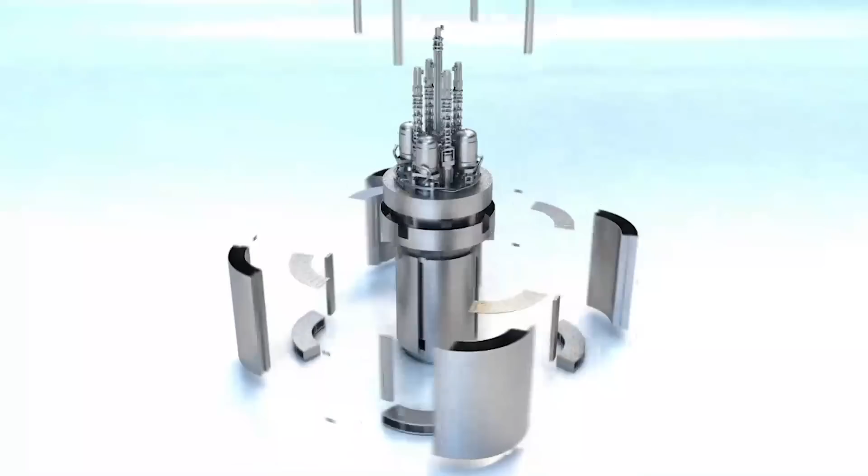Their goal is to bring micro-sized and modular nuclear power plants to the industry. We are Aalo Atomics. We design and build nuclear reactors that are small enough to fit in your garage and can power anything from a data center to a large city.

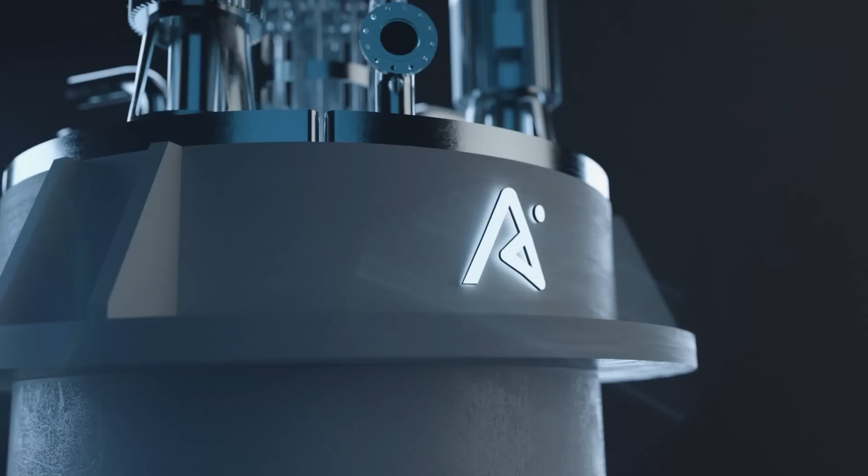To do that, they want to build this factory here to vertically integrate the entire process and mass produce these nuclear plants. Unlike the normal nuclear plants that come to mind, large infrastructure projects the size of factories with thousands of workers and very complex operations, this uses new technology based on work done in the 1950s and 60s to bring semi-truck trailer-sized nuclear power plants.

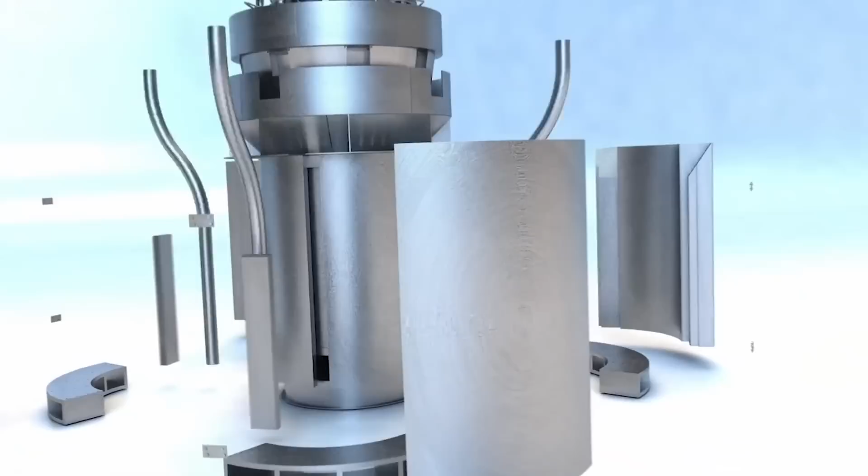And these, as I mentioned, are modular. They can be stacked together, so you could get 1, 2, or 3. Each one of them produces approximately 10 megawatts of electricity. It can also produce thermal energy in addition to the electricity because of the processes that are used.

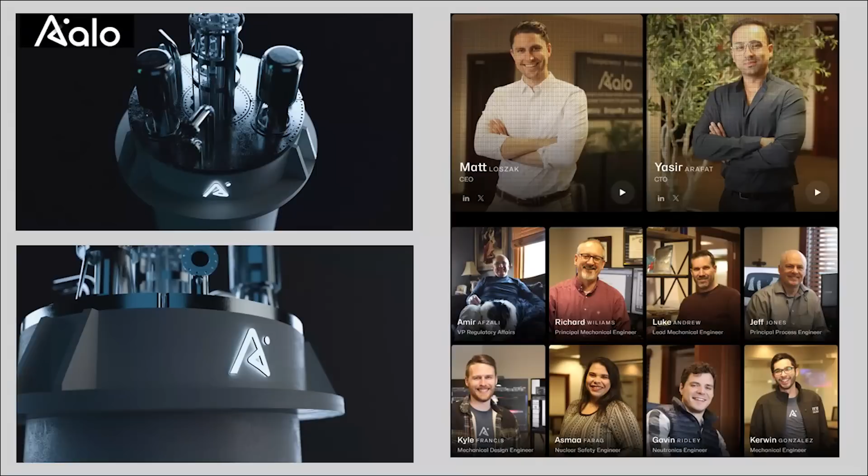Now we're going to go ahead and go into the factory. We're going to get a chance to talk to the CEO of the company, get some more details about their plans, and of course be part of the grand opening ceremony, which is just about to begin. This is pretty exciting, and I'm looking forward to learning more about this company and sharing with you what they are planning on doing, because it is pretty neat.

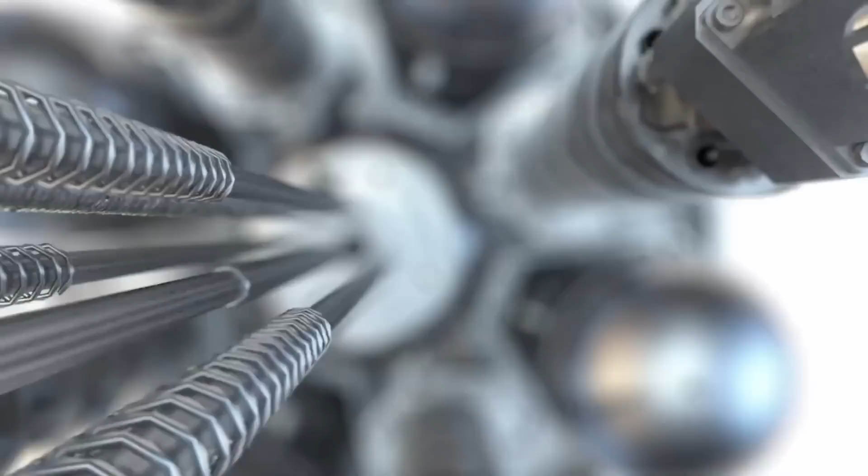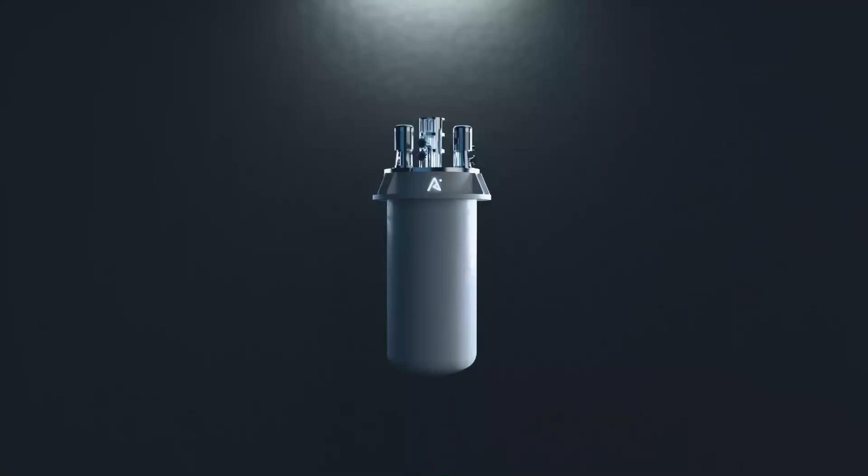These people knew that when they discovered fission, it was way better than anything else that existed at the time. Oil and gas was getting started, and they knew fission was 2 million times more energy dense than oil and gas. They knew that oil and gas would run out in a few hundred years, and that nuclear could last 10 million times longer.

And unfortunately, the whole world took it in a bit of a different direction. For a period of time, as we all know, nuclear energy and nuclear weapons were intertwined, and people tried to essentially throw out the baby with the bathwater. It's taken humanity 80 years since fission was first discovered to disentangle this complex web. But I think right now we're seeing the public realize that these two things are very different: nuclear weapons and nuclear energy.

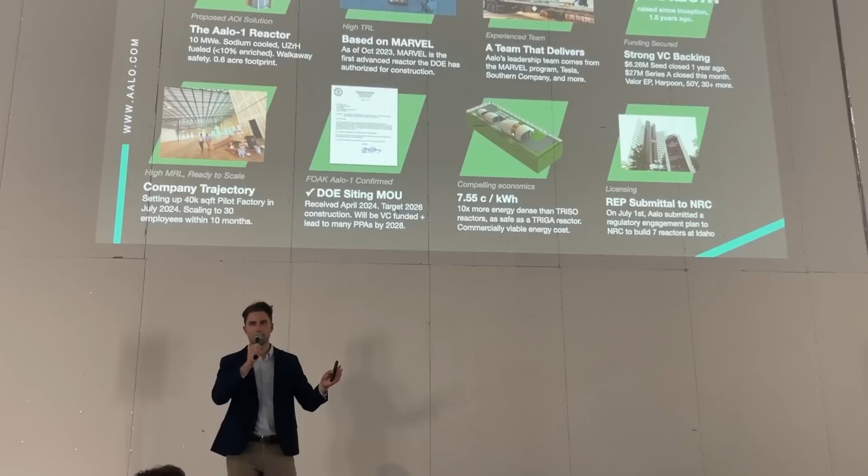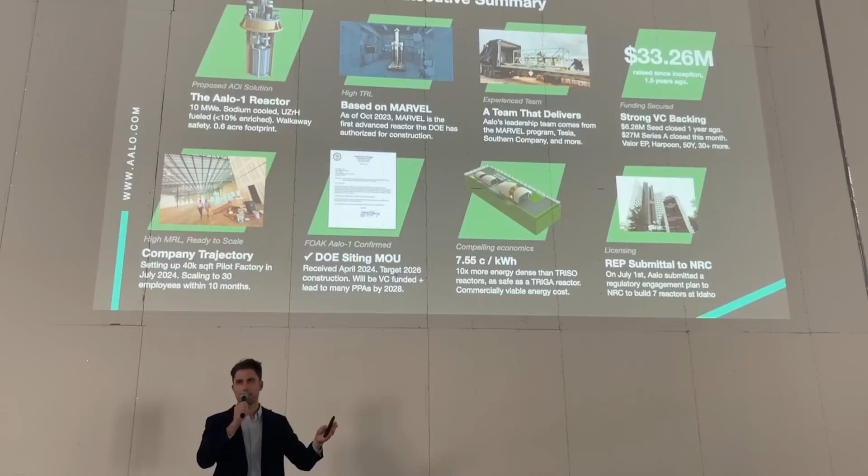I know some of you might know some of these things, but I want to highlight how far we've come. Around 12 to 14 months ago, the company was 1 or 2 people. Right now, 12 months later, we've moved into this 40,000 square foot manufacturing facility, and we've raised around 33 million in venture capital.

We've also recruited the team behind the first new advanced reactor being built in decades, the Marvel reactor. Our co-founder and CTO, Yasir, who is about to go up and talk, is the mastermind behind that reactor, along with many of the folks in this audience. This technology is under construction as we speak. The fuel has been fabricated, the reactor is being built, and what we are doing is commercializing a scaled-up, commercially-focused version of this reactor. We're calling it the Aalo 1.

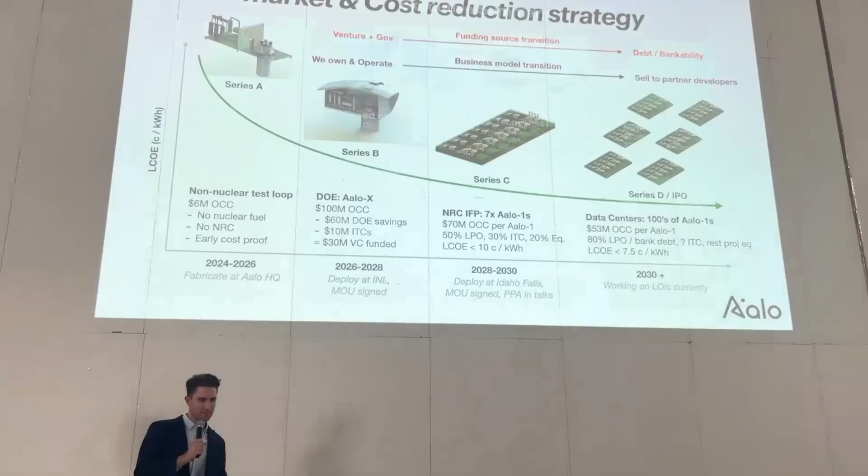So just by chance, these 3 different de-risking strategies fit into the panels of the wall, which is really nice. So the Series A, we're building the non-nuclear prototype that you can come back and see next year. That will help us de-risk the economics, the manufacturability, etc. The Series B that we're planning to raise next year will pay for the Aalo X, the Aalo experimental reactor, which we're building at Idaho National Lab. We're targeting '26 to '28 to build that and go vertical. And that will help us come further down the cost curve, move towards this vision of having this space where you are right now in the world's first small nuclear reactor factory.

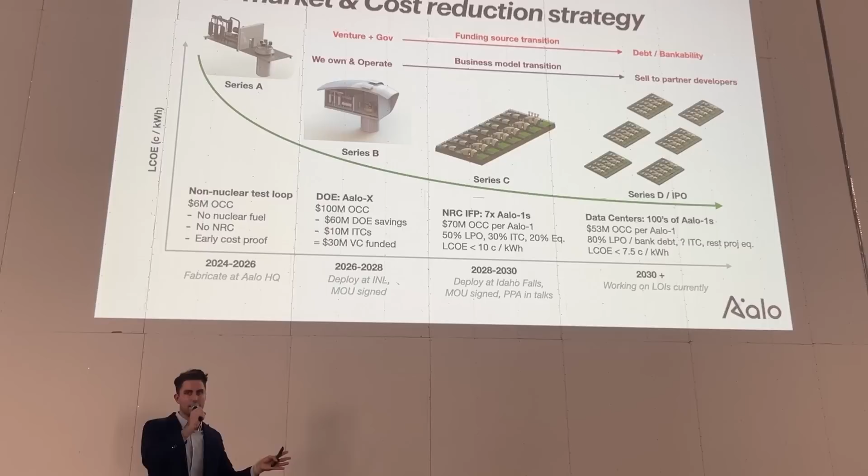So this, we intend to be a model that we can repeat in many places. This will be the first, but it will not be the last. And we'll repeat this in other places around the US. The goal is for each of these factories to be a true Giga Factory, in the sense that it will produce a gigawatt per year for each factory. And we'll repeat this in different locations, different countries, and make a big dent in the energy transition over the next few decades.

And so I want to especially highlight here why we chose Texas. Texas is an amazing place, with a history of cowboys and people doing things differently, not being afraid to trailblaze. Texas is very pro-nuclear. The same cannot be said of certain other states, like California. It has a history of innovation, especially in energy. In the early 2000s, natural gas was not the top energy producer in the US, but thanks to innovation here on fracking and oil and gas, natural gas is now the #1 source of electricity in the country. And we intend to continue that history of energy innovation with the next major source: nuclear.

Additionally, there's a lot of great talent here to hire from, SpaceX, Tesla, other similar companies. And lastly, it's a grid that needs us. It's a really fascinating combination of deregulation, FERC being less relevant, and a need for decentralized baseload energy. So we think this is an incredible place to be deploying the first small reactor factory in the world.

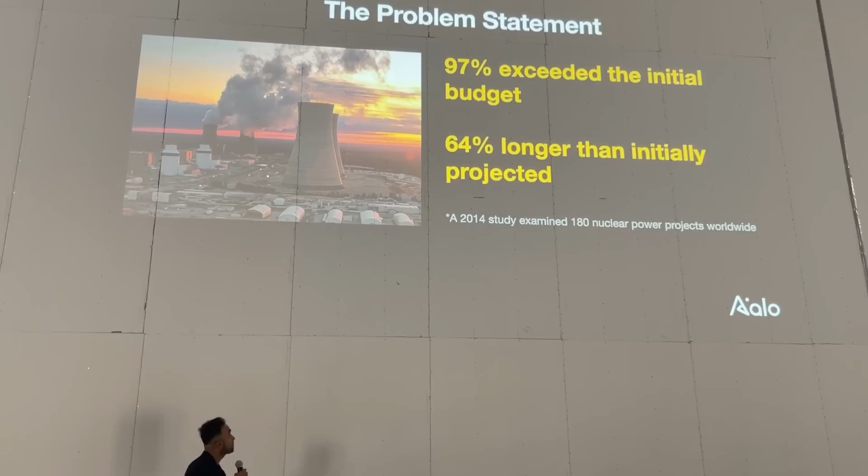And the reason being, if you look at current reactors, they're amazing. They're gigawatt scale systems. They're very reliable, extremely safe. We've been running them for many years.

In fact, we've got nearly 100 reactors in the country that's making 20% of all the power in the country. Did everybody know that? 20% of our electricity comes from nuclear.

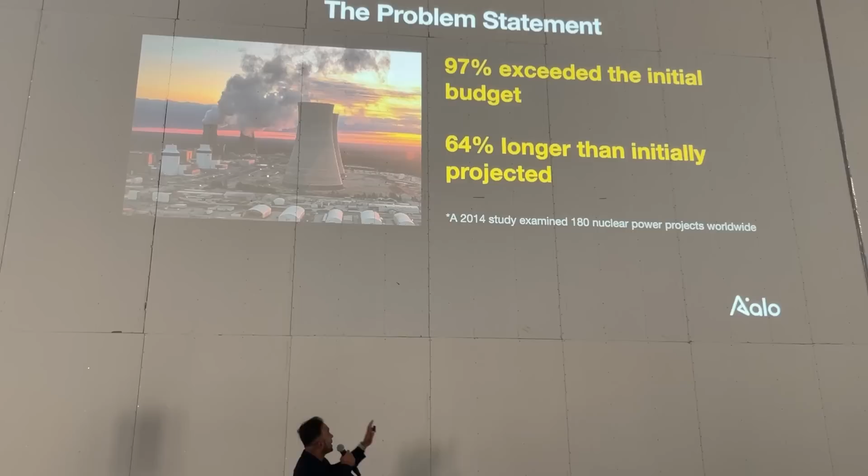But if you want to build new systems, the challenge is it always takes a lot more time and a lot more money than what you originally anticipated. In fact, if you look at the data, a 2014 study looked at 180 reactors around the world, and almost a staggering 97% were beyond schedule and budget. It's kind of crazy if you think about it. And most of them took a lot longer to build as well.

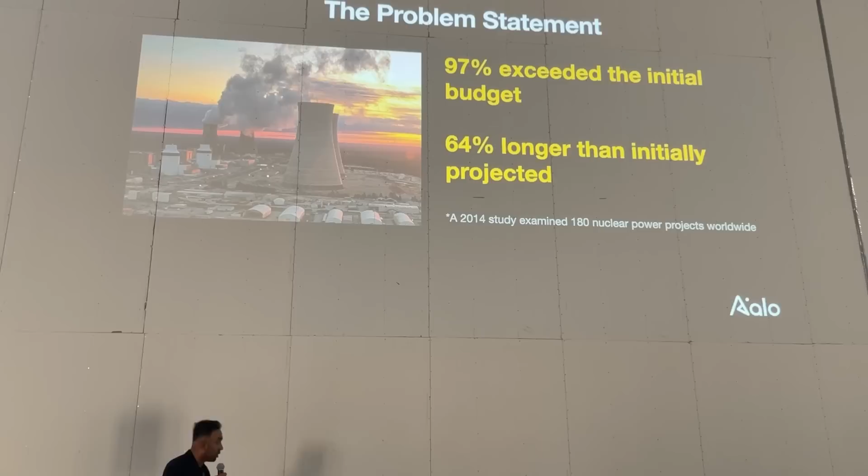And so at Aalo, we think that is an excellent problem to focus on. So what we're trying to do is rethink how we can deploy nuclear systems so that we can avert these two major risks. How can we build nuclear reactors that can be built without the risk of schedule and budget overrun?

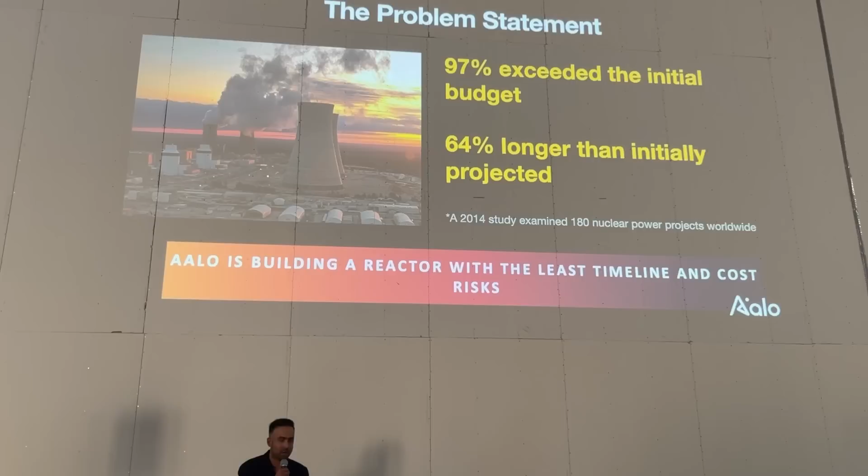The approach we've taken is, instead of building a gigawatt scale plant that at best takes about 10 years to build in the most optimistic scenario to get 1 gigawatt worth of energy, we're focusing on building a lot of small reactors in our factory where we can build nearly 1 gigawatt worth of energy every single year. That's a massive scale difference between 10 years to get 1 gigawatt versus getting the same power each year on the ground.

And as Matt mentioned, if you need more energy, we can have another factory built that can spit out another gigawatt. That's our goal. So welcome to the facility where we're going to demonstrate this.

This will be the facility where we'll be building, scaling up our efforts all the way to 100 reactors. So why are we doing this?

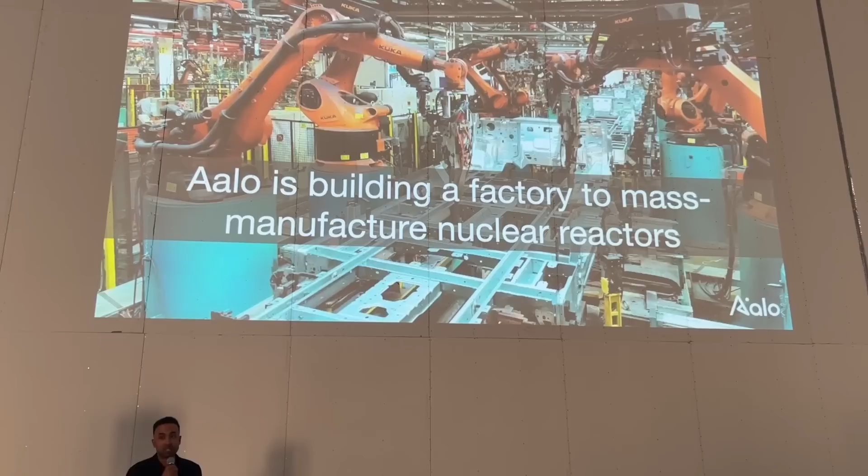Because if you think about it, it's not an entirely new idea. You may have heard of the term small modular reactors. Unfortunately, none of the SMRs are either too small or too modular, right? You only find a reactor or some vessel that is modular, but the rest of the plant is still a bespoke large power plant.

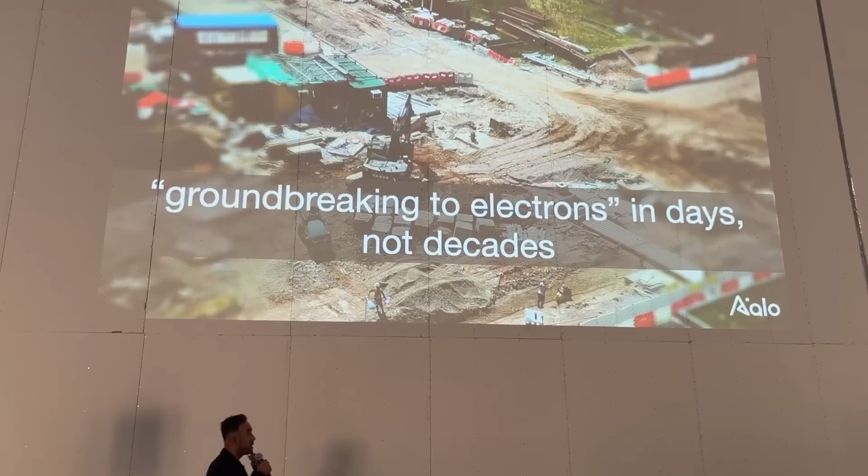What we're doing here is we want to build 95% or more in this factory and only have a small amount of activity that needs to be done on the site, so that from the time we do excavation to the time we generate electrons, it can be done in a matter of days, not a decade. That's a huge shift from how we do things today.

But we have to ask ourselves, what technology is best suited to follow this model? If you look at today's reactors, not every reactor is designed to be done entirely in factories. So we started off from a clean slate and asked ourselves, what is the ideal technology that makes most sense for a small reactor that can be mass manufactured?

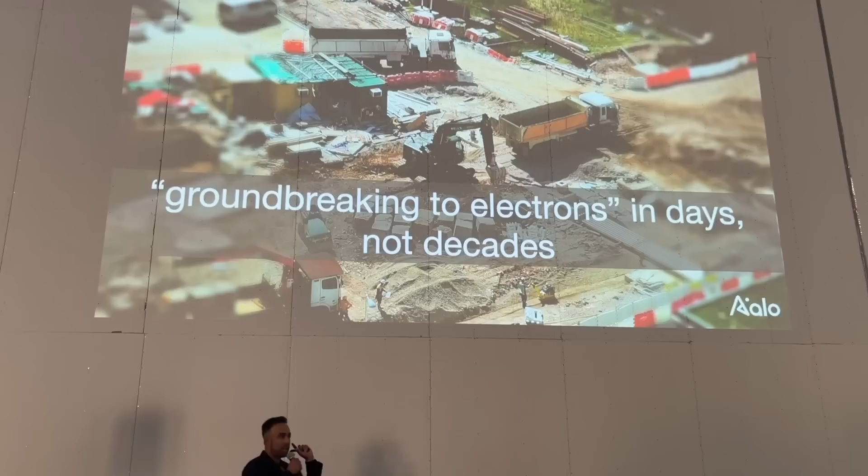And after looking a lot, it really boiled down to one thing: let's go build a reactor that inherently has an amazing, very high power density. That means from a certain volume, how much energy you can generate. That's the strength of nuclear, you can actually have it be very power dense, but not all nuclear are the same. You want to make sure you select technologies that are even more power dense than what we're used to.

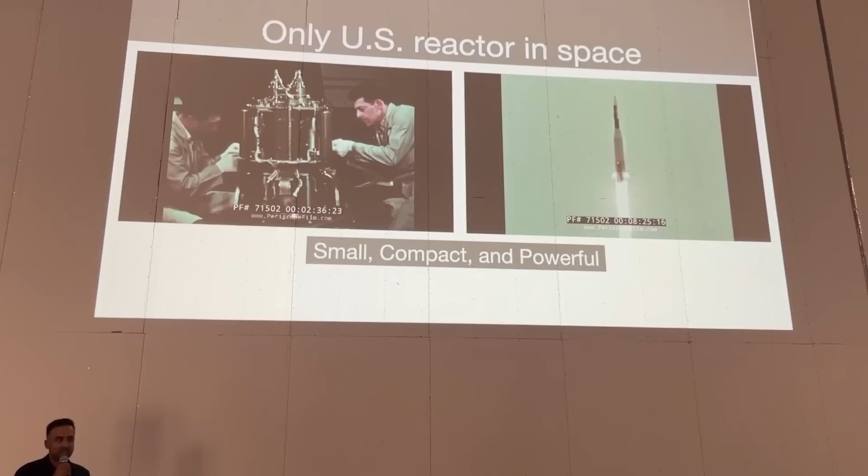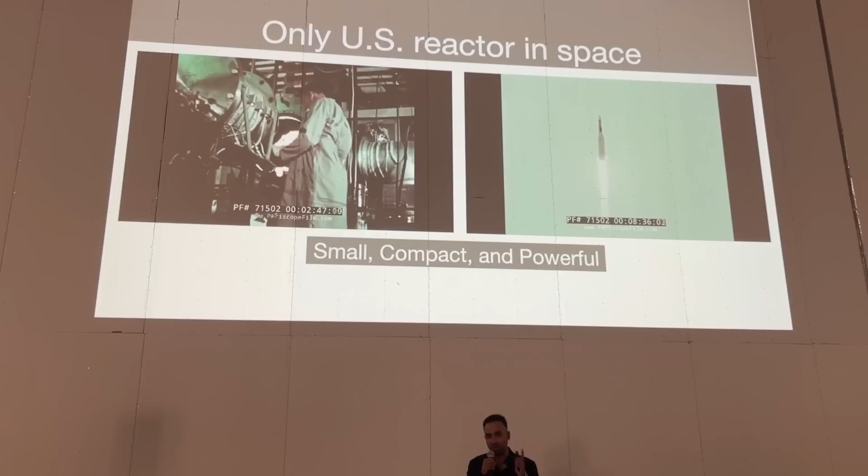And in fact, if you look in history, we did build certain reactors using this very technology. This is a reactor called SNAP-10A. Back in 1965, we built a small, tiny power reactor in this country and flew it to low Earth orbit. This was the first and only fission reactor that was flown to space. They selected this technology because it was small, compact, and powerful.

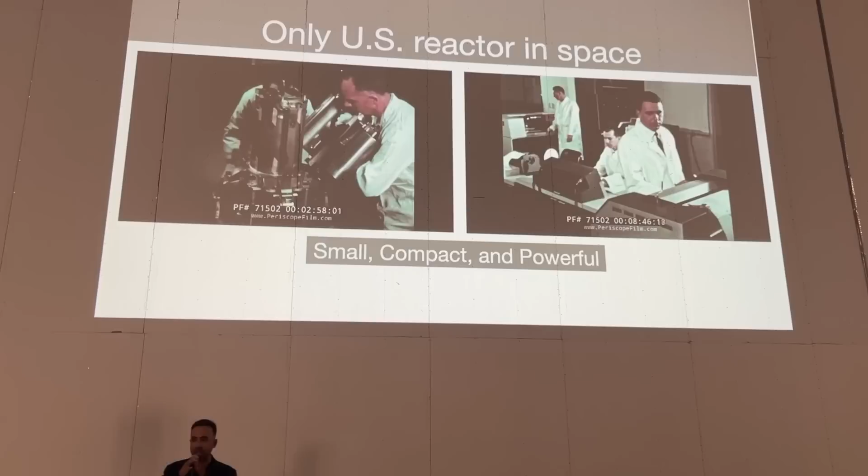You don't need tons and tons of systems to run this. Everything was compacted in a single box. And if you think about what we want to achieve in terrestrial reactors, it's something very, very similar to what the folks tried to build in the 1960s.

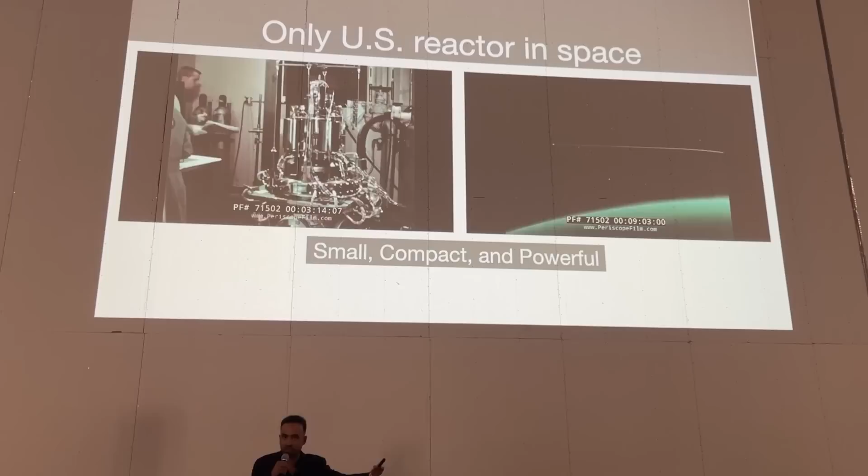So luckily, fast forwarding from 1965, at Idaho National Laboratory I started up a program called MARVEL, which Matt talked about, and we were able to essentially take that original design from SNAP-10A and design a system for terrestrial applications.

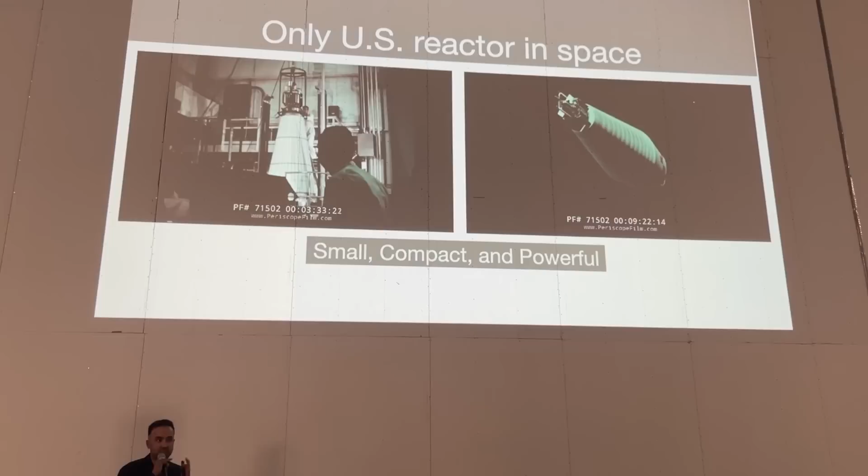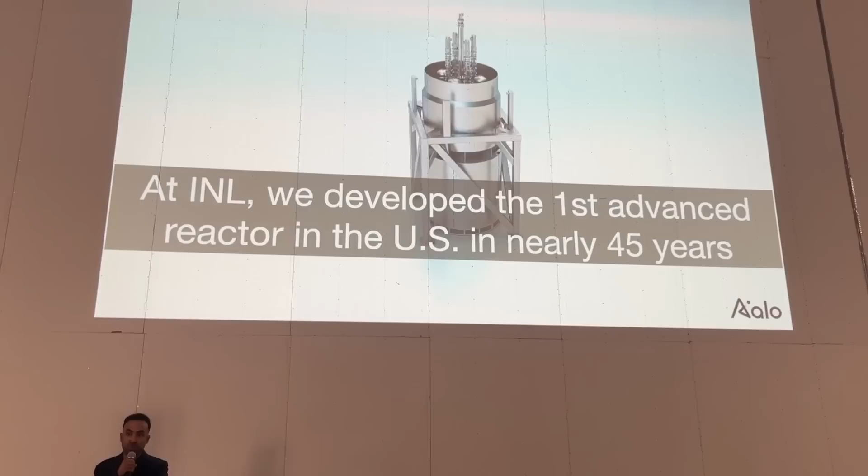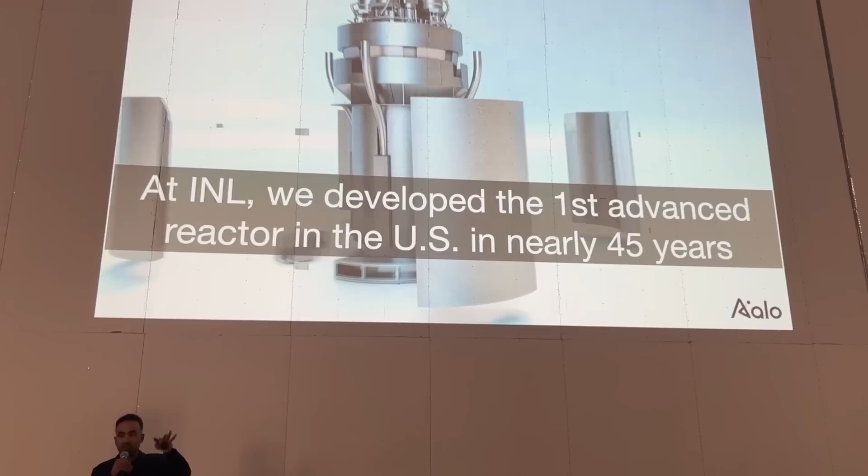And that is called a MARVEL reactor. This project got started right before COVID, and within 30 months, we were able to finish from the ideation to completing the design and starting construction, with a very small team, going in a very agile and skunkworks type, fast, rapid prototyping. A lot of the folks that were on the original MARVEL project are currently part of the Aalo team right now. If you look at this reactor, it's the size of a Cybertruck.

If you tilt it vertically upwards, it can generate about 20 kilowatts of electricity. It's a very small reactor, but we've learned a lot from this technology. It's an amazing technology that has a lot of potential. So we took the tech and the people and started Aalo Atomics' Aalo 1 reactor.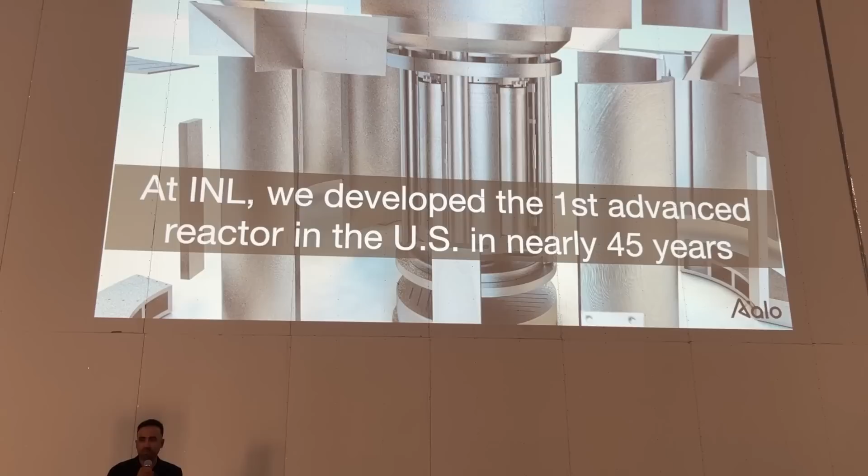So we're roughly about a year into the process. Happy to show you the fuel that we're trying to utilize here. Now, the reason I want to talk about the fuel amid all the technology conversations is because it is truly very unique. We use the same fuel technology as a lot of university research reactors. In fact, if you go to UT Austin, we have a research reactor there that uses this fuel type. And what makes it special is that it cannot have a runaway reaction.

We let our students run these reactors. That's how safe these systems are. There are control rods that make a reactor safe, right? If you withdraw them, the power goes really high and bad things can happen. So I want to show you a little video, basically trying to demonstrate this.

Here we go. So now, in slow motion, we're going to pull the control rod that keeps the reactor safe, and you'll see a bright blue flash of light, but there's no boiling of the water, there's no vessel breaking, there's no meltdown. The reactor physics, the physics of the fuel, ensure safety in a fraction of a second.

So if we want to build reactors that need to go everywhere in society, if we want to mass produce and deploy them at a massive scale, we want them to be as safe as some of our university research reactors. So we took a lot of that learning and incorporated and scaled up the MARVEL technology into the Aalo 1.

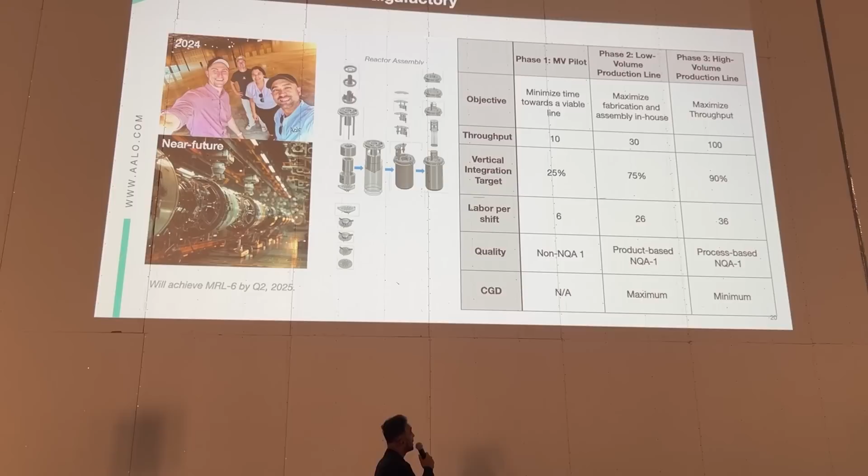We'll do maybe 25% vertical integration. All the learning from that first phase, and that's the 6-month target I'm talking about, will go into phase 2, where the objective is low volume production. Because we are talking to commercial customers who want to purchase the Aalo 1 reactor from us, and we want to be able to deploy those reactors with this pilot line. We'll increase the level of vertical integration, meaning in-house work that we do, from about 25% to 75%, again with a very small team.

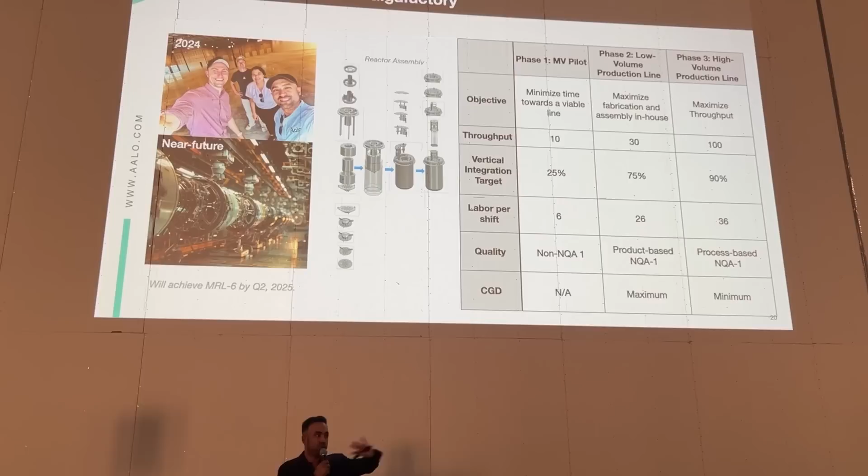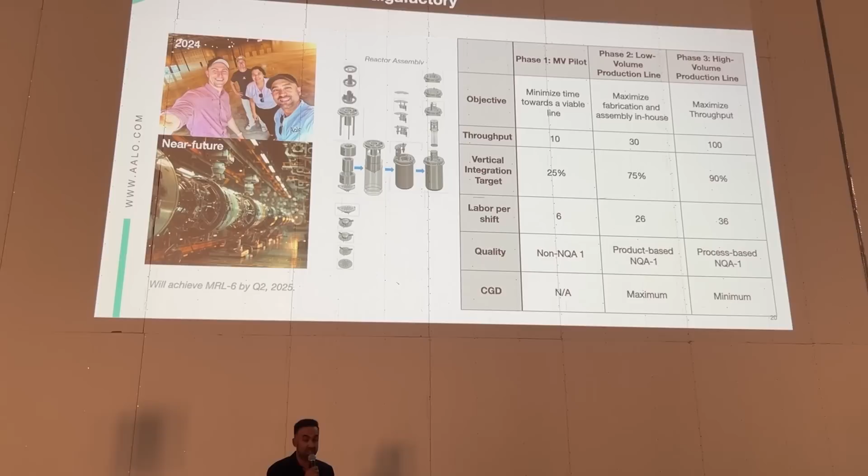And we'll integrate our nuclear quality assurance program. We want to make sure that we can repeatedly build something at the very highest quality that we need in nuclear. Then finally, once we get really good at building those systems, we're going to scale it up and maximize the use of this place to build 100 reactors a year. That's going to be our phase 3. So what you're looking at is roughly 6 months, 12 months, and 12 months before we get through all of these cycles. Very, very rapid when you think about a complex machine like nuclear.

That's a little diagram of how the reactor is built, if you're curious.

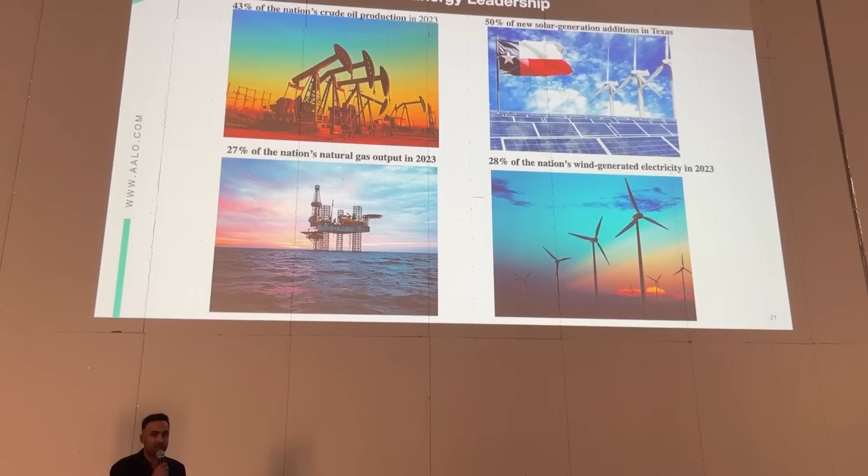Just this year, of all the new solar installation generation coming online, 50% or more will be in Texas, especially in the West Texas area. So Texas already has a long history of being the first adopter for new technology in the energy space, and I think it has done amazing work creating that ecosystem to enable that. I think the next step is to implement a similar kind of impact on the nuclear side, and we're going to start that right here in Austin, Texas, in this very factory. Let's go build together the first nuclear factory.

Last but not least, we can't do it alone. We need a lot of support and help from every single one of you in this room. Alone it will be very hard for us, but together, I think we can make it happen. Thank you very much.

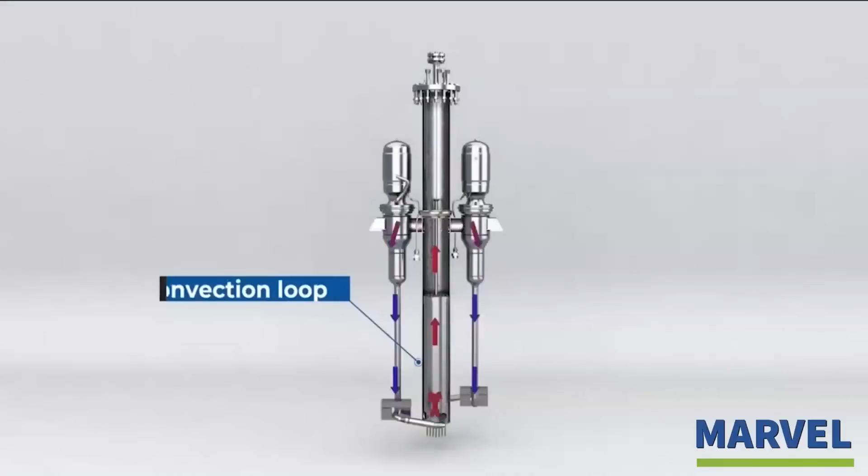I think that was a really great opportunity to hear about Aalo Atomics, what their plans are, and some of the details about their particular modular and mobile nuclear plant, what it can do, the opportunities that are here within Texas. Not only that, but the energy needs that we heard from the ERCOT representative, and also how data centers are a big demand of electrical energy, similar to what we're seeing at the south end of Giga Texas with the Cortex supercomputer cluster that's being installed. The energy demands for all of these systems and other opportunities coming to the state of Texas, not only here but around the country, are immense.

Using renewable sources such as solar and wind, combined with some of our more traditional sources such as oil and natural gas, can only go so far. Embracing and using some of this technology, such as what Aalo Atomics is discussing and what they intend to manufacture, is a critical step in ensuring that we're able to meet those electrical needs.

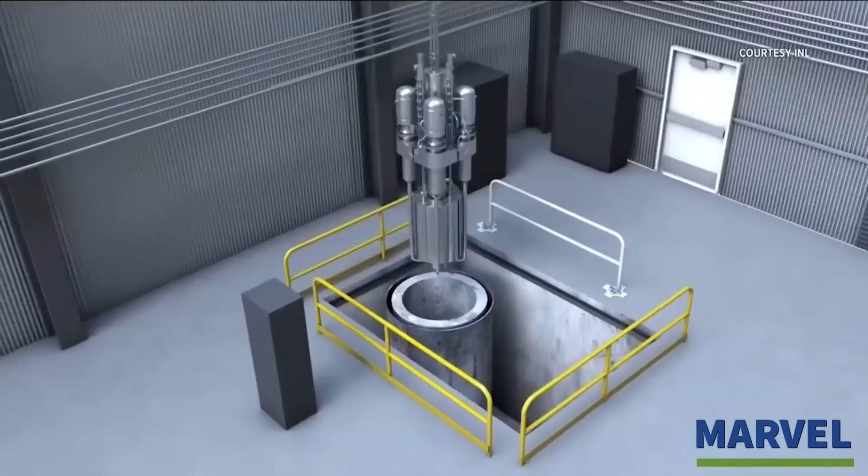So anyway, I hope you enjoyed the opportunity to hear about a new startup company here in Austin, Texas, and what their plans, which are pretty ambitious, can do and what they mean for electrical use here in the state of Texas and possibly larger areas around the country and maybe eventually the world.

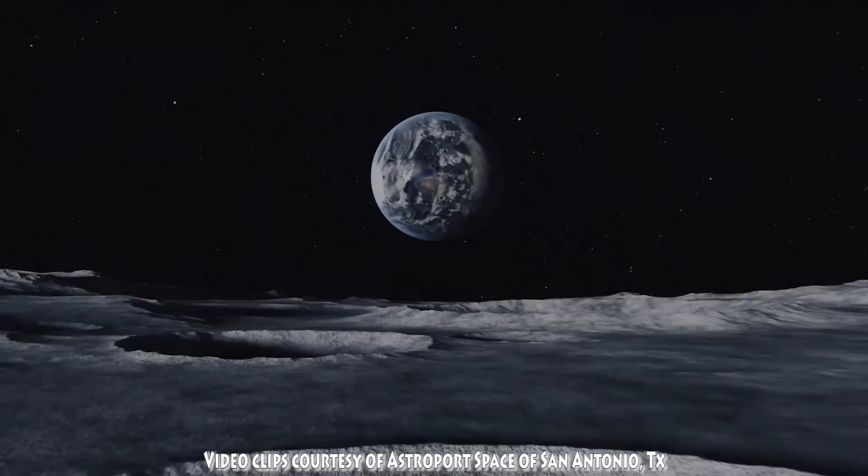Also, another thing I find of interest is that if we do a lunar economy or a Mars economy or perhaps a low Earth orbit economy where we are going to be doing manufacturing, science, and perhaps just exploration, the need for electrical energy is critical. And we are greatly limited in what kinds of electrical energy generation will work in those environments.

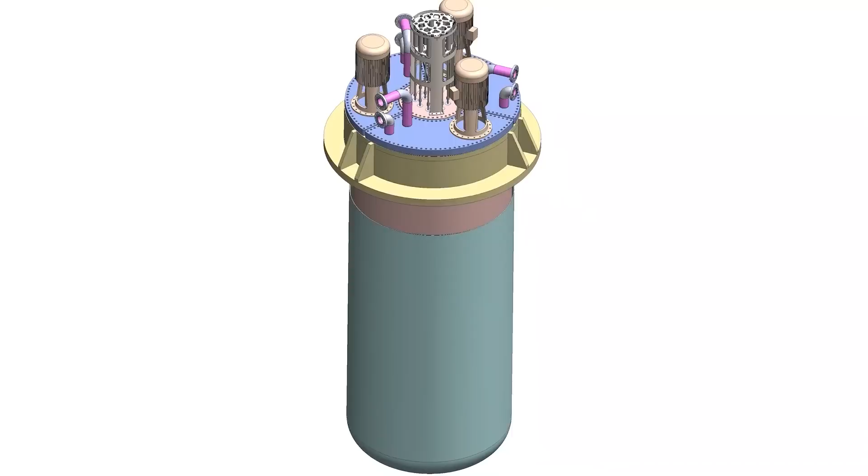Solar works great as long as there's access to the sun. The farther we get away from the sun, the more that distance affects the ability for solar panels and solar energy generation to sustain those off-world economies. Nuclear power in modular, easily transportable forms, such as what Aalo is talking about, will be critical for those endeavors as well.

So anyway, I hope you enjoyed this little bit different kind of topic for my channel, and I hope it also puts into context what the challenges are and what possible solutions there may be. So anyway, thank you very much for watching. I do appreciate it, and have a great day.